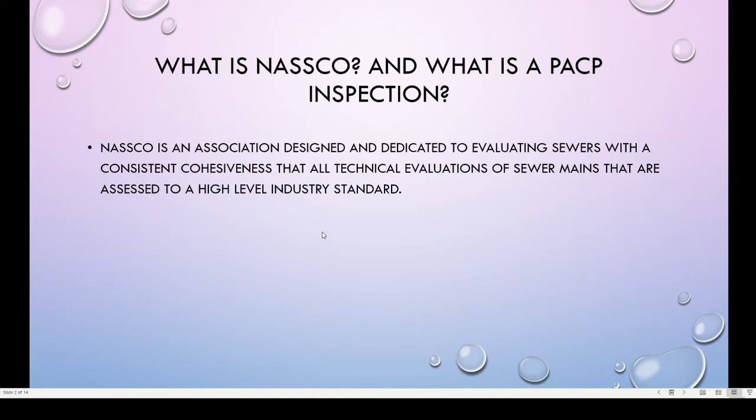So we're going to move on to what we inspect out in the field and what we maintain. Sewer pipes are usually your mainline sewer lines out in the street, hard rigid pipe or flexible pipe, could be PVC. Usually they're clay pipe, and they carry the sewage, designed to carry the mainline flow from a house or a business to the treatment plant.

The PACP program is the Pipeline Assessment Certification Program, which is what PACP stands for. That's pretty much our mainline inspections we do every day.

MACP, manhole inspections, are connection nodes within the sewer system or stormwater system consisting of influent and effluent. Pipes are generally fed with gravity and they move sewage downstream into a treatment facility where they can start the reclamation process. Manholes are the access nodes within that sewer system.

Then we have laterals. Laterals are the smaller mainline connections built and designed by the building and city developers to carry waste from the home or business into the sewer mainline. Laterals are generally smaller, 4-inch, 6-inch, possibly 8-inch, but they are smaller in size relevant to the sewer main, and usually are not maintained by a city, county, or water district.

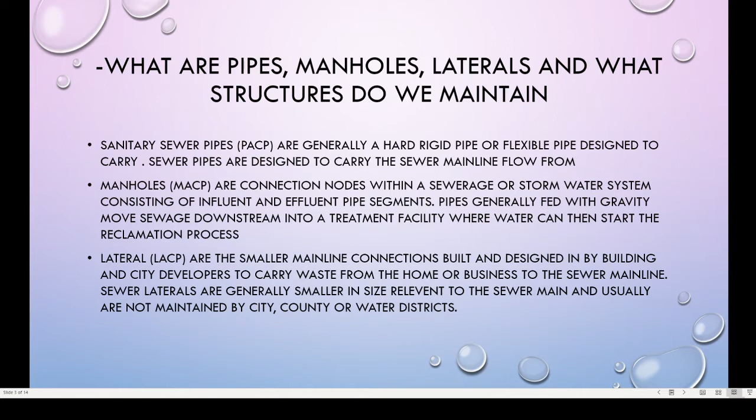So what is the PACP inspection? Any inspection of a pipe segment asset within the piping system, recorded and structured under the rubric of NASSCO's PACP.

With PACP, you're only using PACP codes, only using the PACP header, only using certain aspects that NASSCO has designed into the system. It'll consist of proper headers and coding, and then a video and photograph survey.

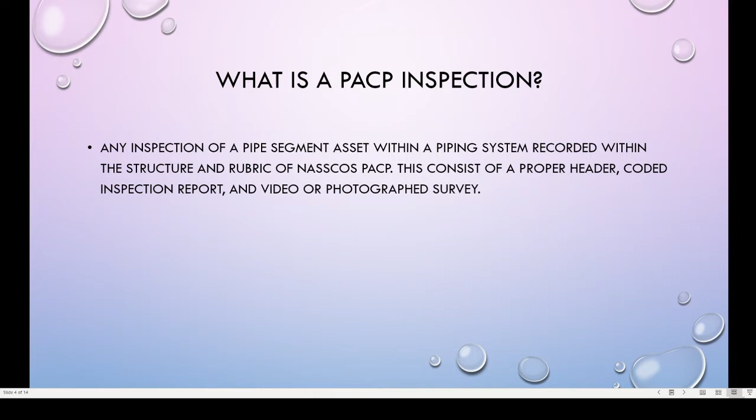With the creation of PACP, it's been a very useful tool for many years. We've been able to have two operators do the same section of pipe and inspect the same section, and produce the same results within that section.

Coding similar, coding the same codes, and making the same observations, so we're getting consistency with a PACP inspection.

The assessment, when you break down the assessment, to the right you have your pretty common PACP header. These headers include anything from the pipe, segment length, relative location details, pipe size, pipe shape, pipe material, upstream manhole data, downstream manhole data, pipe segment lateral data, consequence of failure data, defect codes, and then the condition grades.

There's also areas that are not red. All the red fields are requirements of PACP, but there's also fields that are not red, that are black. These fields contain things like lining methods, year constructed, year renewed, information that you may not necessarily need right at the moment, but it's also a good thing to fill in if you have that information, because you'll never know who the reviewer of these assessments is going to be.

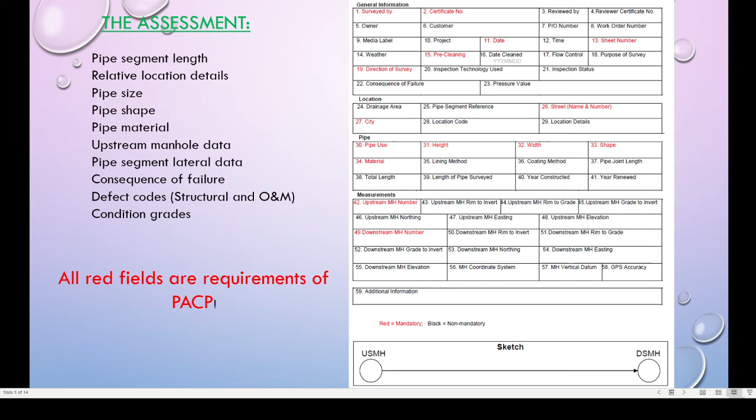The condition assessment, we kind of went over the PACP condition assessment. It gives grades and then can determine a segment score, and the segment scores can be used to calculate likelihood of failure for pipelines.

And then the modified PACP quick rating system bases its highest grade of defect observed within a particular pipe segment. So the grading system, you have 5, 4, 3, 2, 1, with 5 being the most significant defect and then 1 being the most minor defect.

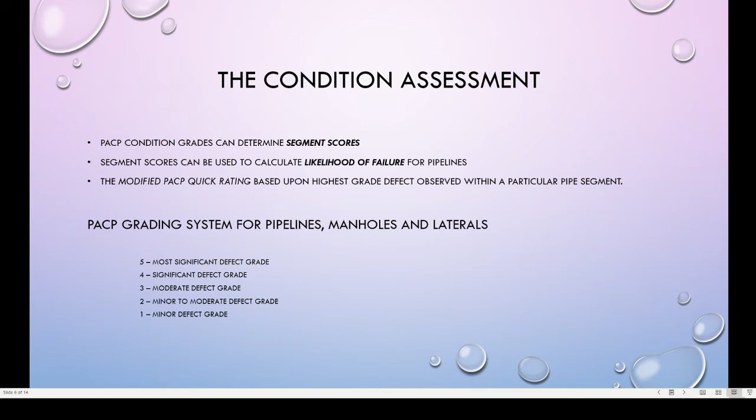So you could have a broken pipe or a collapsed pipe that would signify a grade 5 defect, and that would be in a quick assessment. You would say, okay, grade 5 defects are the highest, those are the pipes we need to fix immediately. Grade 1 minor defects, you do want to look at those, but those may be able to be looked at later on down the road.

So the structural maintenance and capacity, when you're doing sewer line inspections, you're definitely looking at the structural defects. These defects are able to help you estimate the pipe's performance or remaining useful life, and then you can plan on making decisions about repair or replacement of that pipe.

Structural defects tend to be the red flag when you're doing an inspection, and you might find a fracture, or the surface of the pipe wall missing, or a hole in the pipe. Those are usually the big red flags you want to look out for structural defects. Those are pretty important when doing your inspections. You want to make sure you correctly note those defects in the inspection.

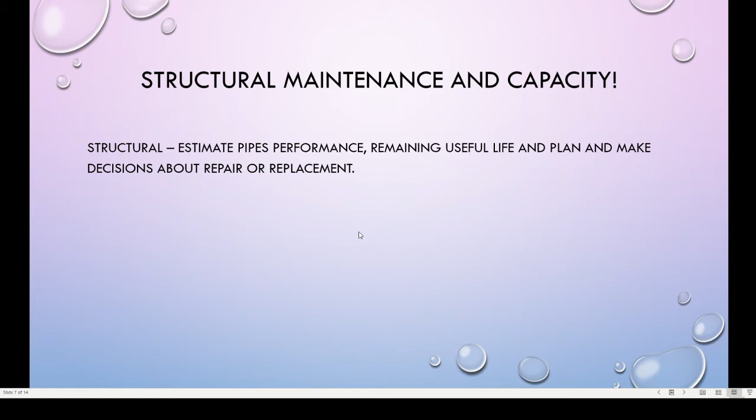And then when you have your O&M maintenance defects, you're identifying trouble spots. You're looking to stop an overflow, and you're becoming proactive in the areas that could potentially become an emergency area. So you're looking at grease buildup, anything that's going to restrict flow, like roots, debris, sediment. Anything, you want to keep the sewage in the pipe.

One of the main goals of a collection system is to stop sanitary sewer overflows, and you want to be proactive in that, and keep that sewage in the line. You don't want it to spill out on the street. Those spills come with hefty fines, and they're just not a good look for your collection systems technicians.

So when you're doing your inspection, you're going to look for those maintenance issues, anything that you would think would cause a stoppage or an overflow.

And then lastly, the last issue we look at is capacity. Doing a CCTV evaluation, you can determine the specific location and cause of I&I, and in many cases I&I is evaluated with a flow meter, but with CCTV you actually get a live video of the flow, and you can always reevaluate those areas during capacity needs.

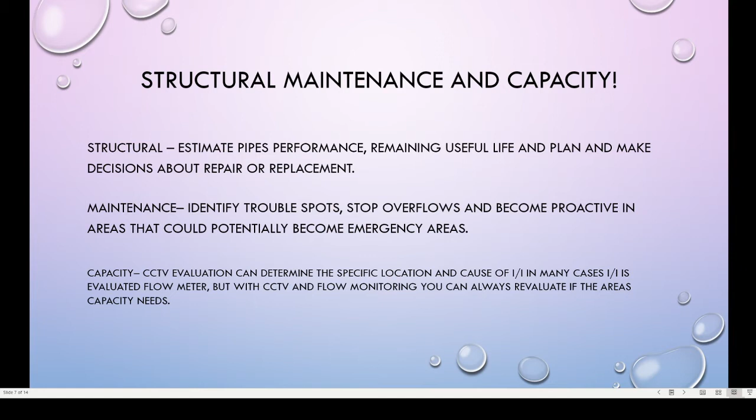Every inspection includes a water level code and then a water level mark, and you can evaluate that change in flow as a percentage, 10%, 5% change of flow. During a rain event, you can always look at that change in flow with the live video camera with the CCTV inspection. So this is a condition assessment window, and this is actually software we use out in Irvine.

You can see that the CCTV survey header, everything is manually entered. There are systems that implement GIS. Those systems can track which surveys you've done, which surveys need to be done, which surveys are in critical areas, the consequence of failure areas, which surveys maybe you're wanting to inspect lines that were done a certain year.

You can track all that stuff with this computerized database system. As you can see, there are the red fields required for our PACP inspection, and then down below you have our defects. In the defect window, you have start defect with the beginning code, followed by an AMH, which is a manhole code, and then the remarks. The remarks are going to tell you your manhole number, and then the water level right below that, at 0 feet.

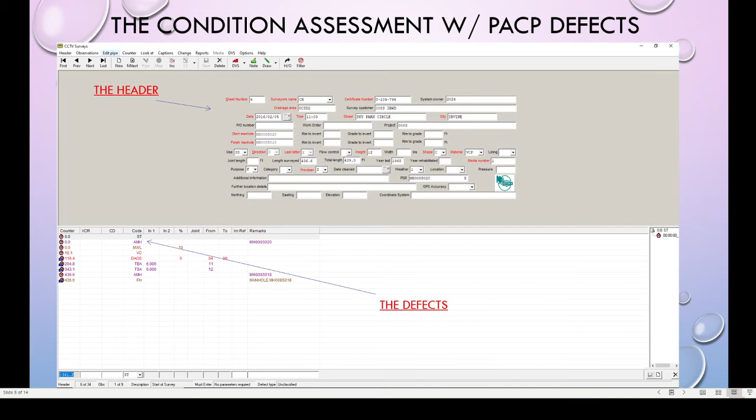You can see here there's a broken pipe. It's coded as a B, and the 10 to 3 o'clock position is the clock position and lower pipe location, circumferential location for this broken pipe.

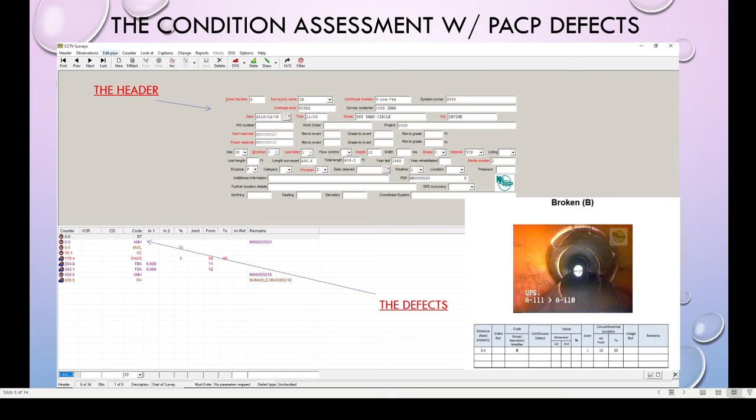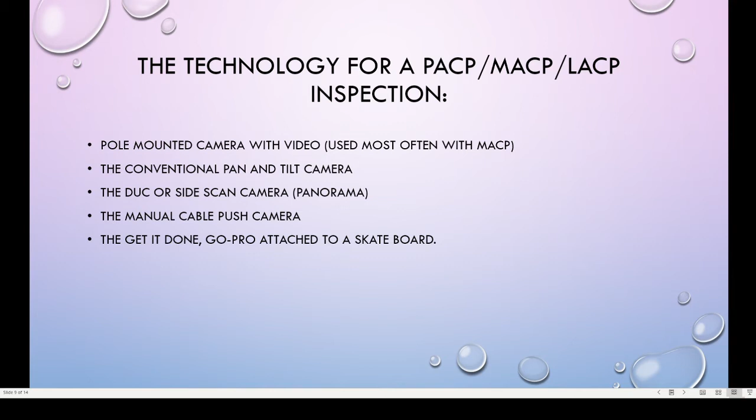So the technology for the PACP, MACP, and LACP inspections, there's a multitude of cameras out there. There's the pole-mounted camera with video. It's often used just for doing manhole inspections. It's quick, pretty much a zoom camera. It's attached to a pole, so it does not travel inside the pipe segment. It's just for a quick look at the manhole structure and possibly 10 to 20 feet upstream and downstream of the manhole.

And then you have your conventional pan and tilt camera. These usually are on a transporter. The conventional pan and tilt is pretty commonly used still today - probably 95% of the camera systems out there used today. They tend to be relatively cheap, less than $100,000 sort of system, and you can get pretty good video and a pretty good inspection with a conventional pan and tilt camera.

The new DUC camera, or side scan camera, or panorama camera - they are a new technology. It's actually two cameras built into one transport unit. To describe the side scan camera, you pretty much have an ongoing picture as you travel down the line from both angles. You get the front camera and the back camera. It's hard to explain, so we'll go into that a little further a few slides later.

But then you have your manual push cable camera, and these are usually done by your plumbing company, your local plumber will have a push cable camera. They're mainly for smaller segments of pipe, usually residential lines. The smallest I've seen a push camera used on is probably like a 1-inch pipe. You can get a pretty good picture with a push camera, but then again you're limited by the flow level. If the flow level is too high in that 1-inch pipe, your camera size is relative to the pipe size.

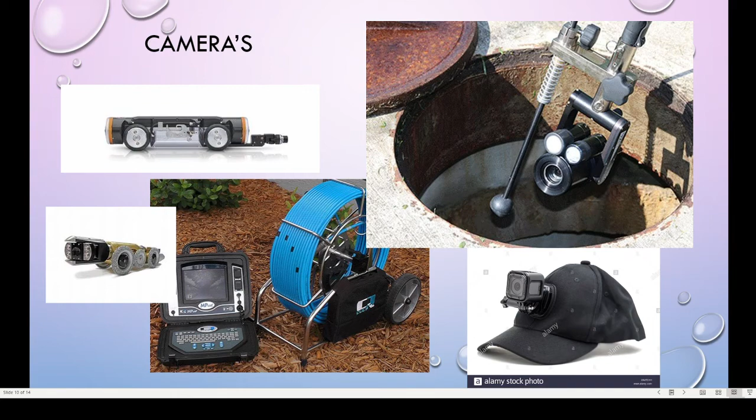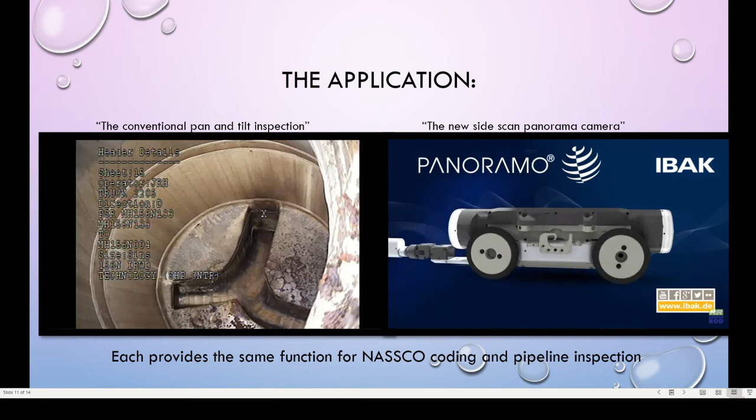So the application for the side scan camera and the conventional cameras - side by side, these are two videos playing at the same time. The left inspection is your conventional pan and tilt, and on the right hand side you have the new side scan panorama camera. Each provides the same function for NASSCO coding in a pipeline inspection, but with the conventional pan and tilt camera, you're actually coding live as you watch the inspection.

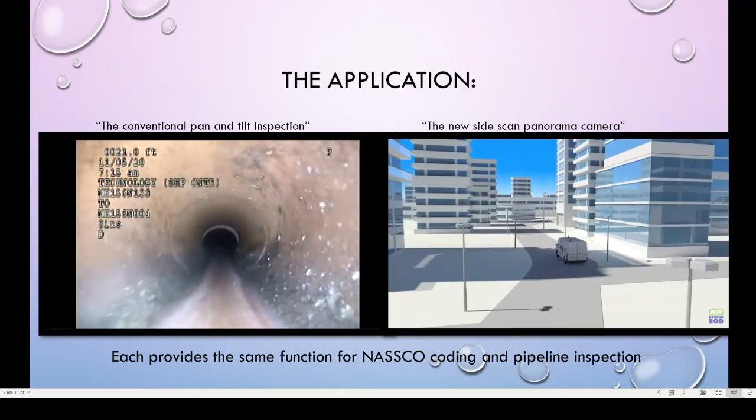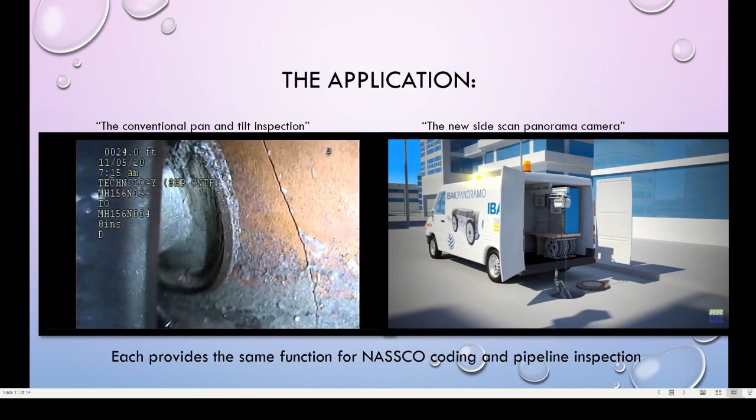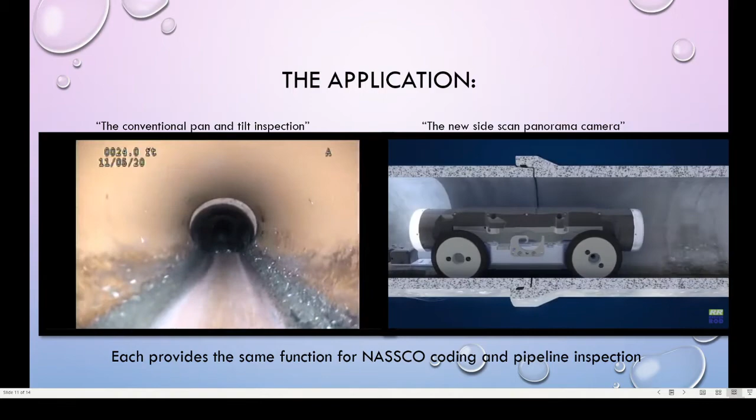So we'll go ahead and fast forward this left inspection, and you can see image quality is okay. Panoramo is going to give you a better image quality. Panoramo is going to have a 4K camera. The Panoramo is just going to give you more inspections per day.

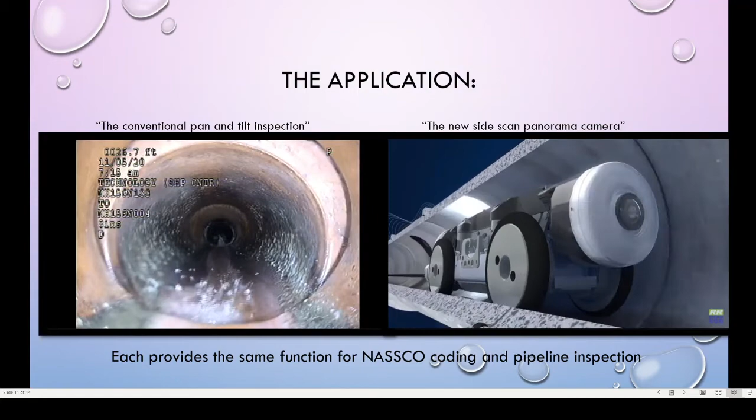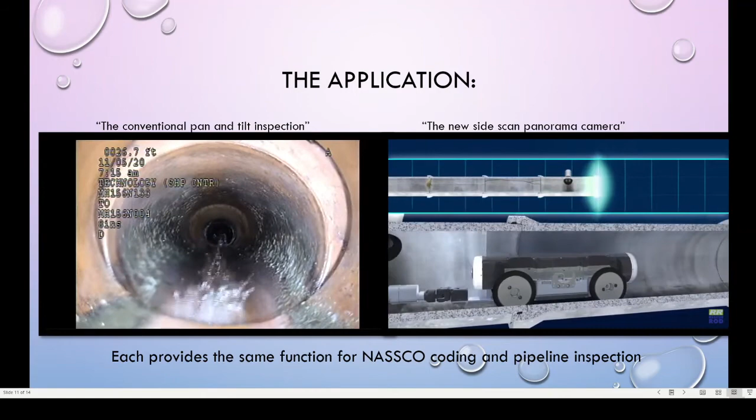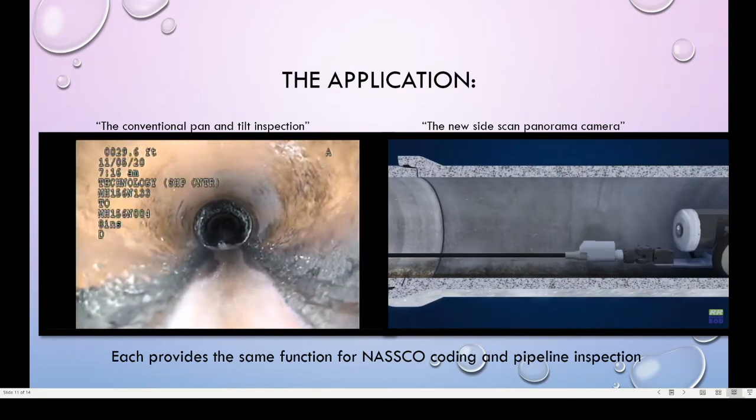As it travels down the line, it's going to give you the 360 degree view of the pipe segment, whereas the conventional pan and tilt on the left is just going to give you that 180 degree view of the front side of the camera.

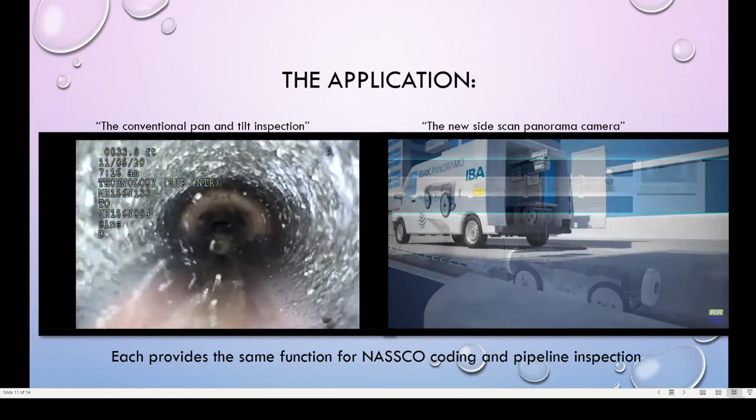And as the inspection on the conventional pan and tilt progresses through the pipe segment, you're stopping to code different things, stopping to make your notations. Whereas on the side scan, your data collection is all done in the field, and then the data input is done back in the office.

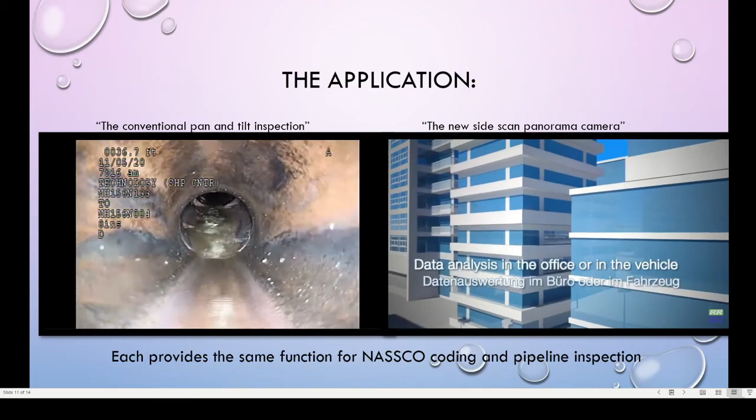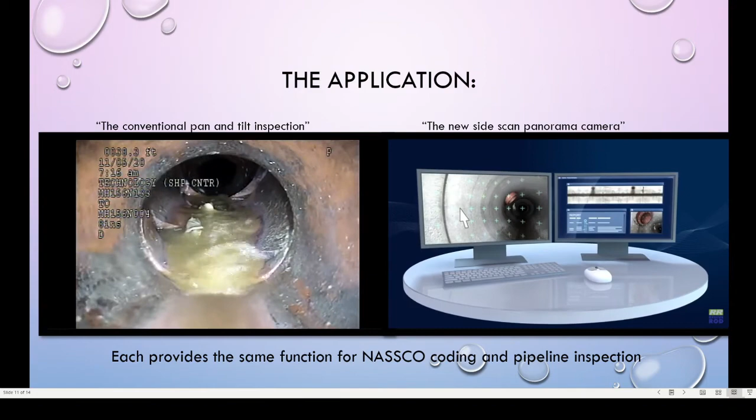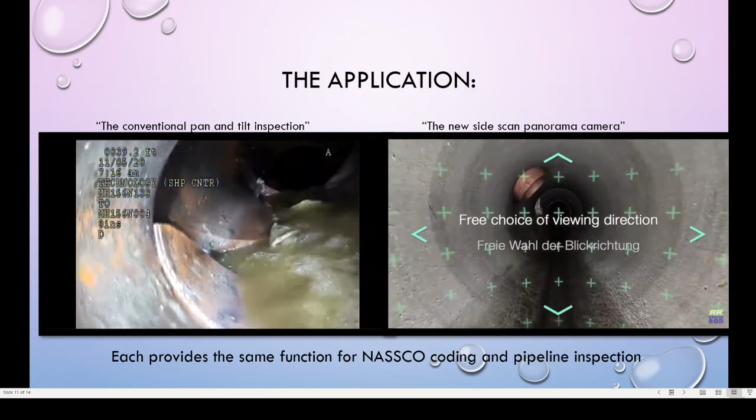These different types of cameras, cost-wise, the pan and tilt is going to be cheaper than the side scan, but you do get a lot of options with this side scan panorama camera.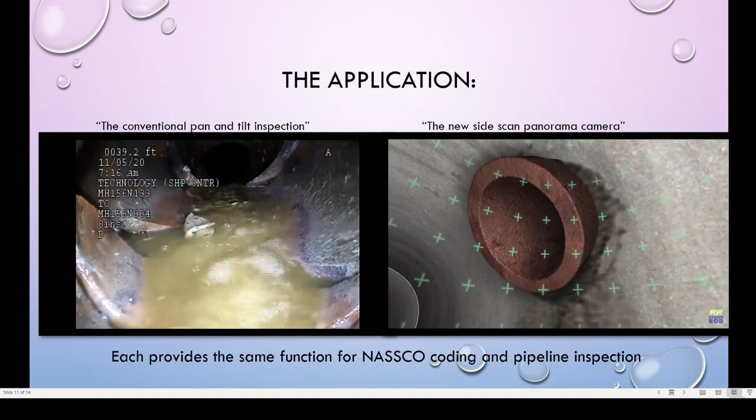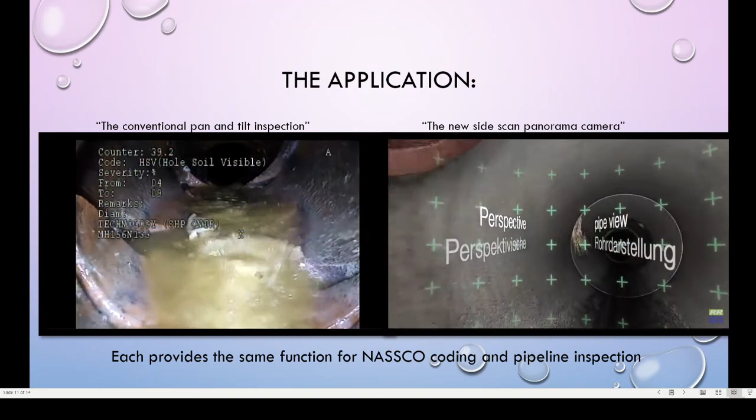So the issues between the two inspection systems: for the pan and tilt, operators are on-site compiling reports within each manhole location, and during the live video recording, operators tend to operate slower due to the hands-on experience. There's a lot of moving parts in these pan and tilt cameras.

They tend to be less cost effective, and can easily be damaged by an operator. Your daily footage tends to be lower due to the operator's composition of on-site reports.

The side scan - all reporting is done in post-processing away from dangerous locations, roadways, and easements. Deductions in overall cost per linear foot are saved in operator costs. You're saving money in traffic control, equipment maintenance, and the coding of observations.

So just generally less time you're spending out in the field making those notations. There's no moving parts designed within the camera. Simply lowering the camera into the manhole is simple - you don't have to move much on the camera to start your inspection.

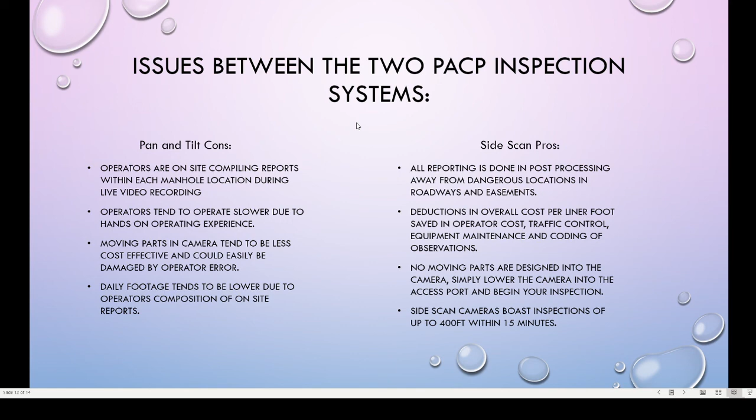And the side scan boasts up to 400 feet within 15 minutes. There really isn't a footage-within-a-time-frame standard for pan and tilt because it's all operator dependent, and it depends on how good of an operator you have in that unit operating that pan and tilt camera and doing that PACP inspection.

So of course, our choice here - the winner for pipeline inspection to NASSCO coding would be the side scan option. It's cost effective. The side scanning offers a rapid assessment of the pipelines while providing data needed to prioritize rehab and maintenance.

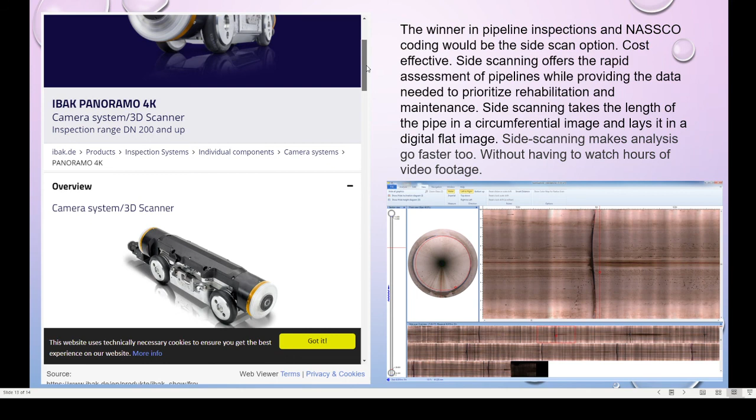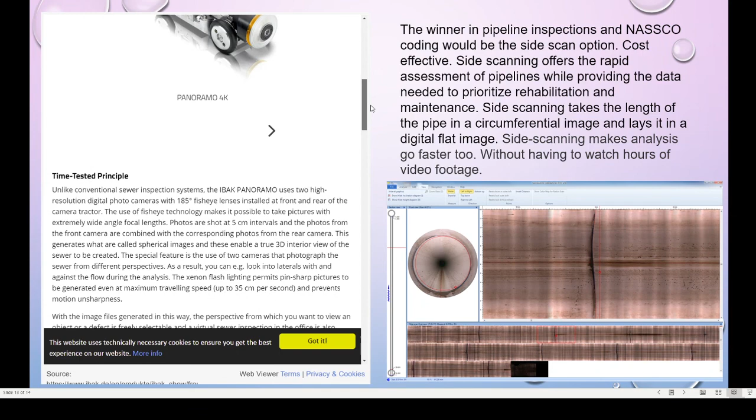Side scanning takes the length of the pipe and pretty much lays it out in that flat image, and side scanning makes analysis faster. You don't have to watch tons and tons of hours of footage, which can get to an operator out in the field watching that footage every day, doing it over and over again.

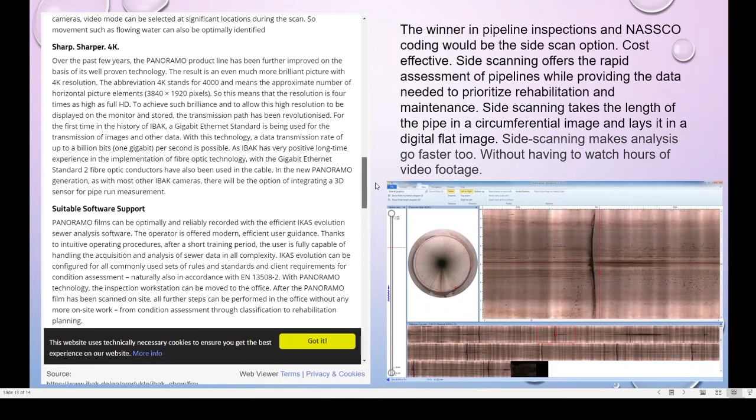It does make a good operator, but it's a lot of video to inspect - there's a lot of pipeline to inspect. I think out in Irvine there's over 180 miles of sewer pipe to inspect every 10 years.